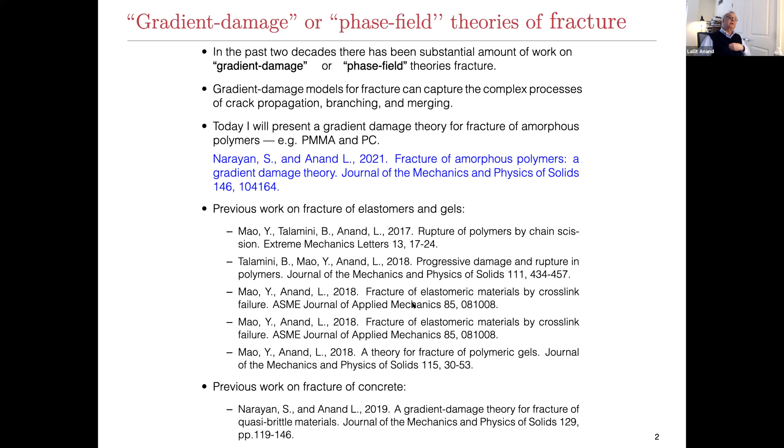I'll concentrate on fracture of polymers, the amorphous polymers, which are the simplest of the polymer types. The most common amorphous polymers are PMMA, polymethyl methacrylate, and polycarbonate. PMMA is typically thought to be brittle, polycarbonate is thought to be ductile, whatever that means, and I'll say more about that in a moment.

So PMMA, this is its chemical structure. It has a radius of gyration of the molecule of about 0.6 nanometers. The Kuhn length of the segments is about 1 nanometer. Polycarbonate is essentially the same, very similar in terms of geometric dimensions. One characteristic feature: I'm only going to talk about the response below the glass transition temperature. For reference, PMMA's glass transition temperature is about 115, and polycarbonate's is about 145 degrees centigrade.

Okay, so if you take specimens of these materials and do a compression test.

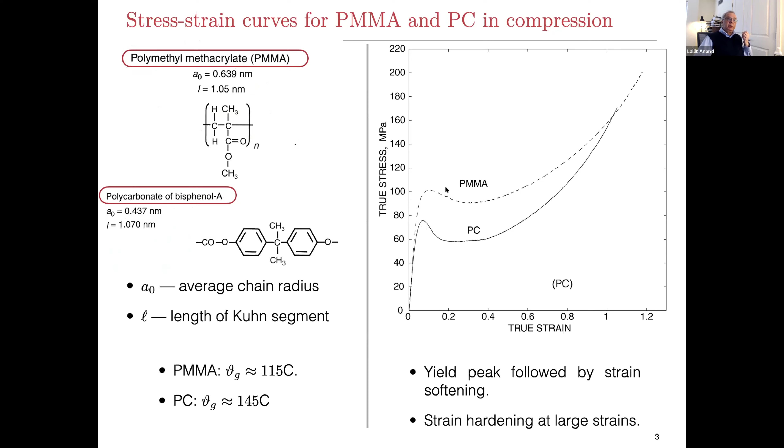So in a compression test, this is what the stress strain curve looks like. You have a yield peak, it softens, and then it hardens quite dramatically. PMMA is about 100 megapascal yield strength in compression, and polycarbonate is about 80 megapascal. So the yield peak is important in these materials.

In fact, the yield peak depends quite sensitively on the prior heat treatment of the material. If you take the material above the glass transition temperature and quench it, it has a so-called higher degree of disorder or free volume, and the yield peak is lower. If you take the same quenched material and anneal it so there are more tightly packed atoms, the yield peak is higher. This could differ by 20 or 30 megapascals just from small amounts of heat treatment.

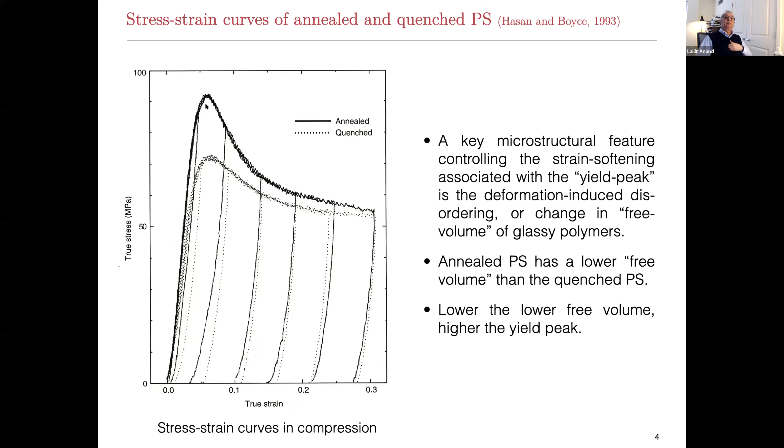The other thing to note is that this is an unloading curve. There's also plasticity prior to the peak. So people call this the yield peak, but in fact there is plasticity prior to the yield peak in the material.

Because of the softening at the yield peak, you actually get strain localization. You get shear bands. In fact, plasticity in these materials is essentially due to the formation and multiplication of the shear bands. This is in polystyrene.

Before the peak, you get some shear bands, and then near the peak you get a whole bunch of shear bands. These shear bands, since this is in compression with the vertical direction, are symmetrically disposed to the maximum principal stress direction.

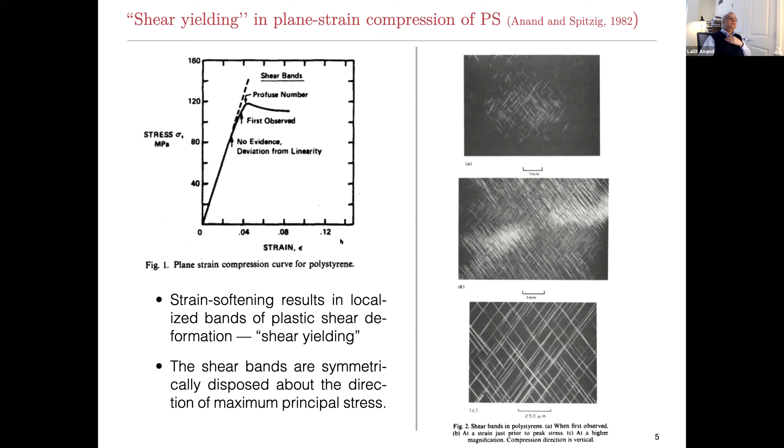Okay, so that's in compression. The response in tension is quite different. There is shear yielding prior to the peak, but PMMA will actually fail very close to the peak.

If you look at the microstructure of the material, you'll see it's filled with what look like crack-like features, but they really are crazes. Here's a higher resolution micrograph of one craze, and what you see is there are fibrils which are bridging the boundaries of the craze.

So a craze is also a band of localized deformation, but it's a dilational plastic deformation. There are these holes which are interspersed with the fibrils, which bridge the faces of the craze, and eventually those fibrils will break, and you'll form a crack.

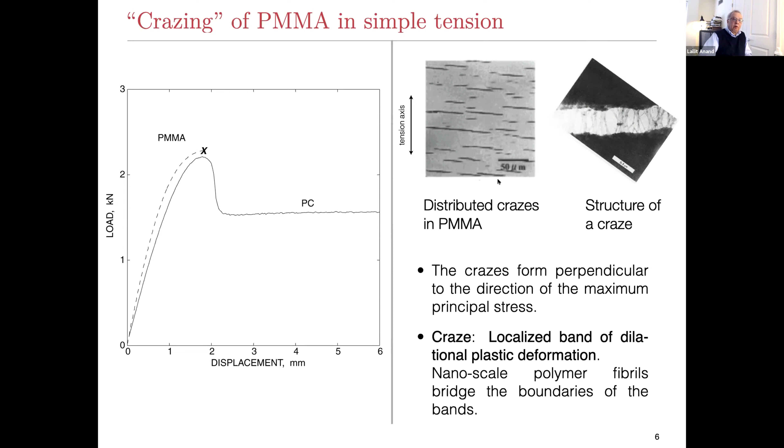Polycarbonate, on the other hand, because of that strain softening, will neck and draw out. Here's a specimen of polycarbonate—originally this was straight, but now it's necked down, and the plasticity in this is due to the shooting out of the shear bands into the undeformed region. I'll show you a movie of this drawing out process a little later.

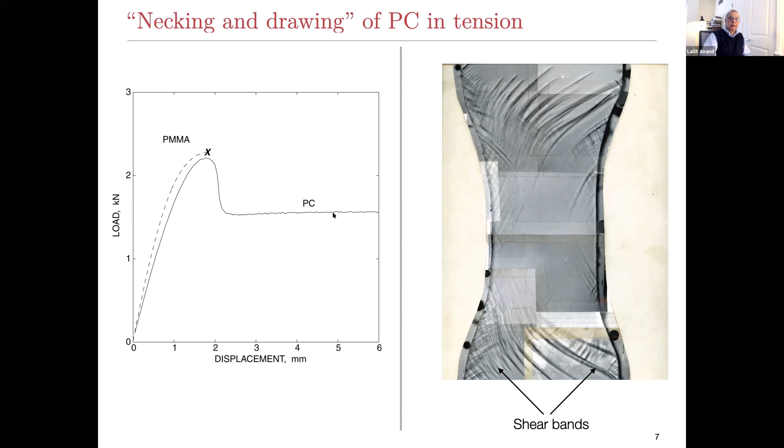So what is the major difference between PMMA and polycarbonate? In the polymer literature, there is this notion of entanglement density. Unlike elastomers, which are cross-linked, these amorphous polymers have mechanical cross-links—they're just entanglements. The number of these strands per unit volume is called the entanglement density.

The way it's measured is you measure the storage modulus, a linear viscoelastic measure, just above the glass transition temperature of the material. Based on that, using essentially a Neo-Hookean model—this will be the storage modulus, this the temperature at which you measure it—you calculate the number of entanglements per unit volume. That number is huge, on the order of 10 to the power 25 entanglements.

But there is a difference: for things like polystyrene and PMMA, that number is about 4 times 10 to the power 25, but for polycarbonate it's about 40 times 10 to the power 25. So polycarbonate is 10 times more entangled than PMMA, and that makes a big difference to the mechanical response of the material.

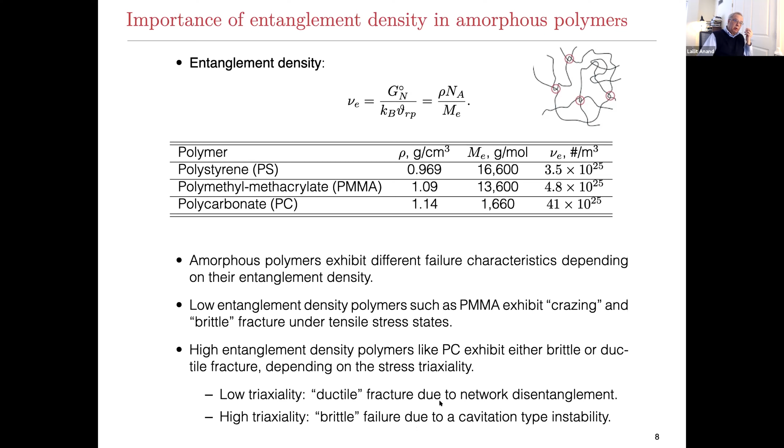So low entanglement density materials like polystyrene and PMMA will craze, and are called brittle or quasi-brittle under tensile stress states. High entanglement density material like polycarbonate will neck out and draw under low triaxial stress states, but if the triaxiality is high—at the tip of a notch, for instance—polycarbonate is also brittle. In fact, when you measure the K1C of these two materials, they're both about 1 megapascal square root meter. Okay, we'll come back to this issue.

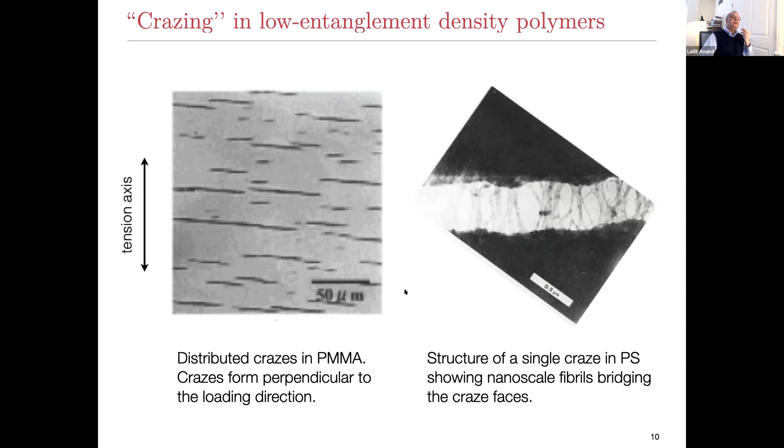So a little more—I'm going to focus first on the low entanglement density polymers and the modeling of failure due to crazing. I've shown you this picture of the fibrils bridging the boundaries of the craze. Here's a nicer looking picture of the same phenomena.

This is from the work of Desai, Kovic, Basu and co-workers in 2011. It's polystyrene, and you see these fibrils. This is the face of the craze, and the size of the fibrils is about 30 to 40 nanometers.

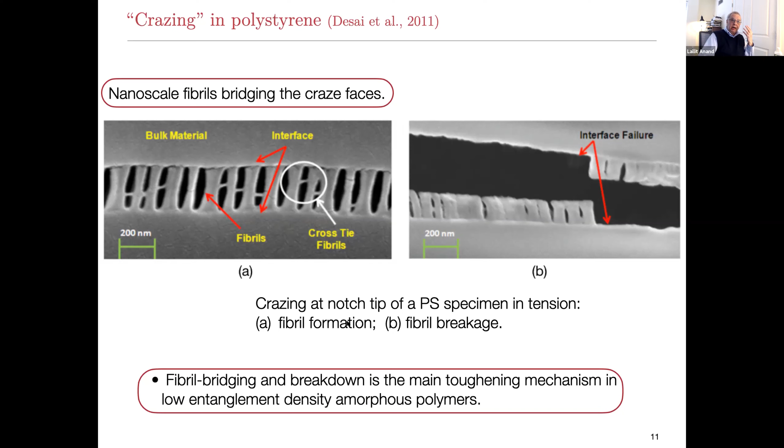Eventually the crazes' fibrils will break, and you'll get a crack. So fibril bridging and breakdown is the main toughening mechanism in materials like PMMA and polystyrene, which are low entanglement density materials. So they're not brittle, but they're quasi-brittle because there is some inelasticity and damage in these materials.

So I'm going to talk about gradient damage theory. What do I mean by damage? By damage, essentially, I mean the craze breakdown process. If the craze has broken down completely, the damage has gone to 1. If the craze hasn't really broken down yet, then the damage is equal to 0.

So there will be process zones, if you will, ahead of a crack where there's crazing, where the damage goes from 0 to 1. And in that region, there will be a gradient, mathematically. Physically, you see this stuff. So when we talk about the gradient damage theory, it's basically related to the breakdown process of crazes.

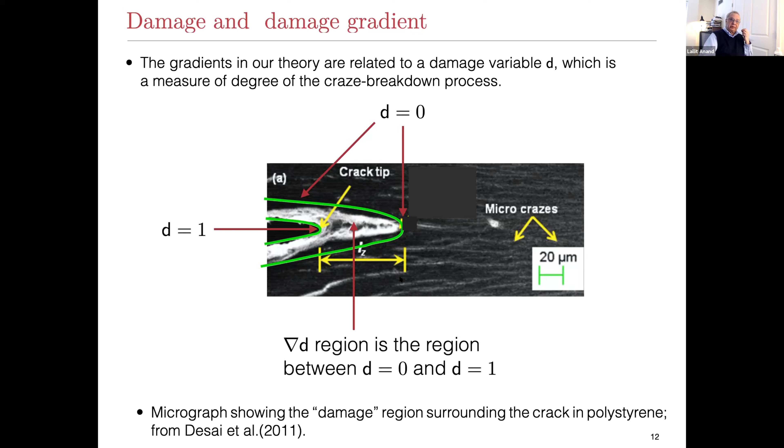So the model that I'm going to construct is conceptually very simple. In one dimension, you have some elasticity, there is some plasticity, and then at some point you'll get crazing, and then the craze will break down, and that's when you get the damage, and then you'll get failure. That constitutive model looks like a traction separation law, but it's a full 3-dimensional model.

And that will be the constitutive response at some integration point in our finite element mesh. But in addition to this damage happening, there will be a gradient in the damage. So we need to construct a theory where there's a gradient in the damage. First of all, physically, there's always a gradient, but then also mathematically, that's what helps to avoid mesh dependency related issues in finite element simulations.

And this idea, of course, goes back to Professor Bazant way back in the mid-80s and several other people in those days when people were looking at concrete and other failure of quasi-brittle materials.

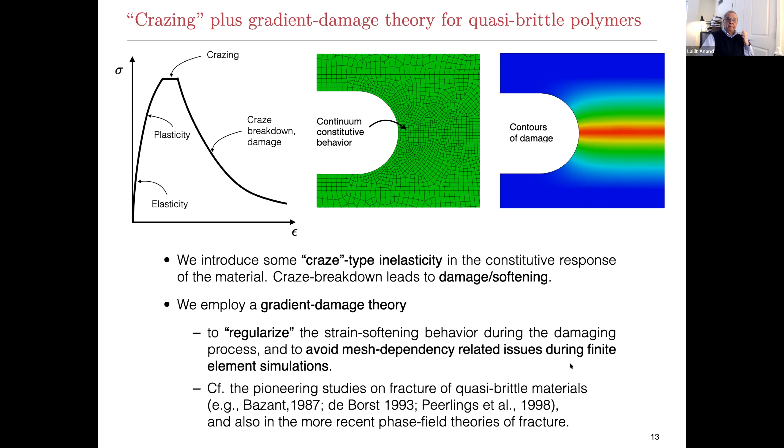So how is the theory formulated? In continuum mechanics, we'll have the motion, the deformation gradient, the velocity gradient. And I'll take the deformation gradient to be decomposed into an elastic part and an inelastic part. I use the word inelastic because I want to differentiate between plasticity and crazing.

So the evolution equation for Fi, the inelastic distortion, will be di Fi. I'll ignore the inelastic spin. And di is either a dp or a dc — P for plasticity or C for crazing. So there's going to be a switch in the mechanism at a certain point in the deformation history that we have to define, where di can be either dp or dc.

So dp is given by a deviatoric plastic stretching, a shear rate, and a direction. And dc is a dilatant inelastic crazing. The trace of dc is not equal to 0, whereas the trace of dp is equal to 0. So there will be a magnitude for crazing, and the direction will be related to the maximum principal stress.

All right, so there will be a switch in the flow rule. If I look at the velocity gradient, I can write it in terms of an elastic velocity gradient in Fe, and this di Fe inverse. And I can rewrite it in terms of gradient of chi dot — chi being the motion, so this is the velocity — F dot E Fe inverse, and then these two additional terms for gamma dot P and craze rate.

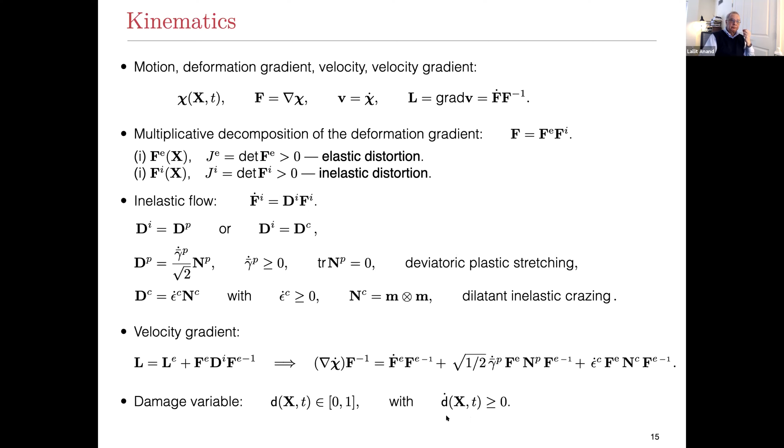So the theory that I will discuss is based on this virtual power formulation of the basic balance laws. What are my kinematical variables? My kinematical variables are chi dot, which is the velocity, Fe dot, gamma bar dot P, which is the equivalent plastic shear strain rate, the craze strain rate, and the damage rate. These are not independent because they're constrained by this kinematical relation that I just discussed. In addition, we have the kinematical constraint that D dot is positive. So these are my kinematical variables, which have to obey these constraints.

Corresponding to chi dot, if I look at any part of the body, we can think of an external work, which is rate of work done on that part, and an internal rate of work. The external power is chi dot times the traction acting on the boundary of the part, plus chi dot times the body force, which can include inertia. Because of this gradient damage term, there's also a boundary micro traction term that comes into play.

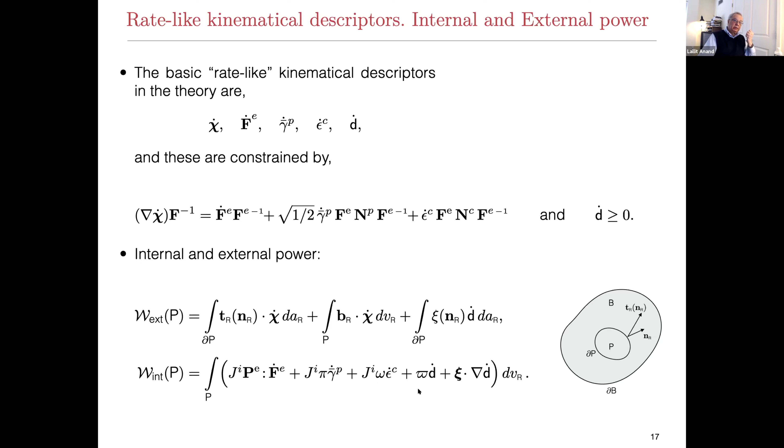So these were my kinematical fields, and I'm going to treat them as virtual velocities to figure out what the basic balance laws are. So instead of chi dot, I'll write chi tilde for a virtual velocity, f tilde e for a virtual f dot e, and so forth. Those virtual quantities have to satisfy the same kinematical constraints that we had previously.

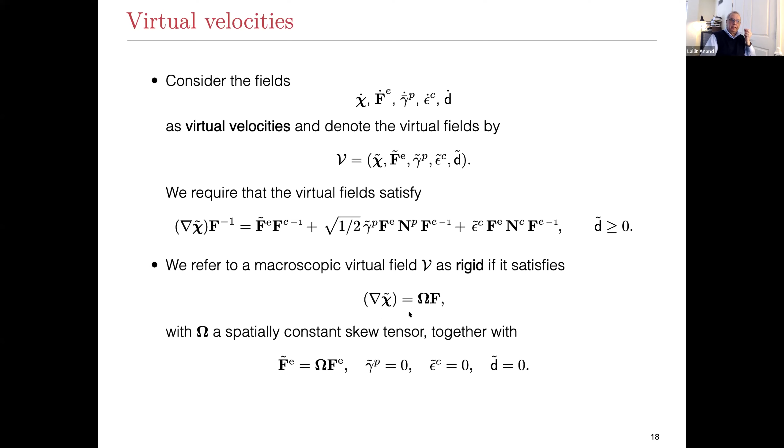I'll need one other notion, and that is the notion of a rigid virtual velocity field. A rigid virtual velocity field is essentially one for which there's no plasticity, no crazing, no damage. Basically the velocity gradient is omega, which is a skew tensor times f, and that omega is spatially constant. So it looks like a rigid rotation, or a rigid spin.

So here's my external virtual power, and this is my internal virtual power. The principle of virtual power says that given any part P of the body, the external power has to equal the internal power for all virtual velocities. That's the first part. The second one is, if the virtual velocity is rigid, then the internal virtual power is 0.

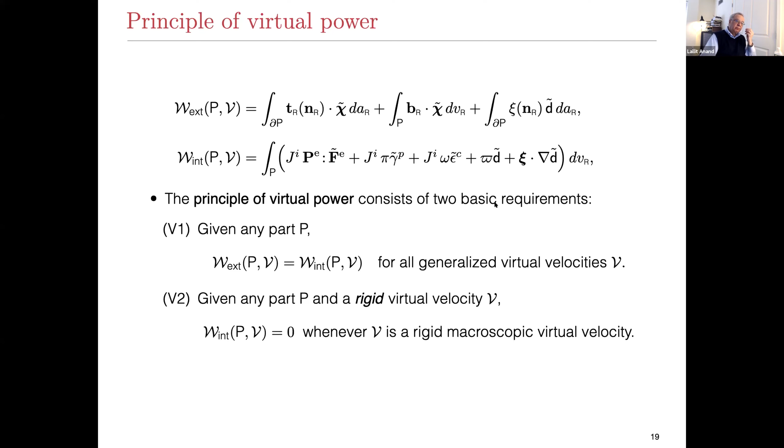And that is the principle. If you apply this principle, you will get the basic mechanical balance laws for the theory. The first one is you get the macroscopic force and moment balances. If we remember PE is conjugate to FE dot, but we have these other terms, so I can define a stress T sub R based on the conjugate PE and FI inverse. That stress satisfies a force balance and a traction condition, as well as a symmetry condition. And that, of course, is the classical first Piola Kirchhoff stress.

The Piola stress is related to the Cauchy stress by the standard relation, J inverse TR F transpose. We can define two other stresses: the elastic second Piola stress and the Mandel stress. The elastic second Piola stress is essentially like the total second Piola stress, but now with respect to FE inverse. And the Mandel stress is CET.

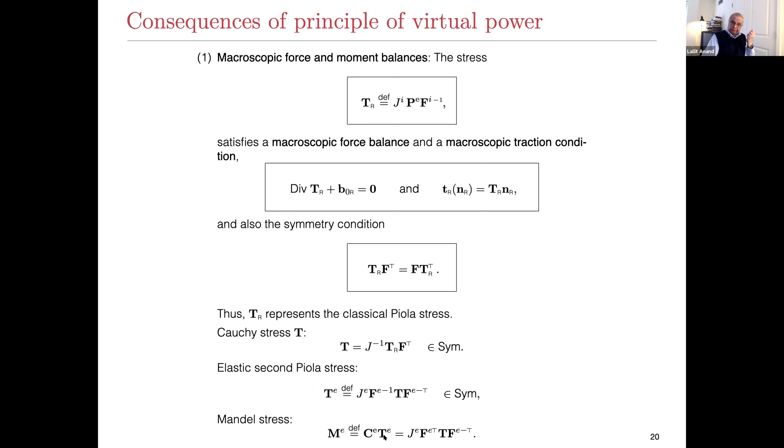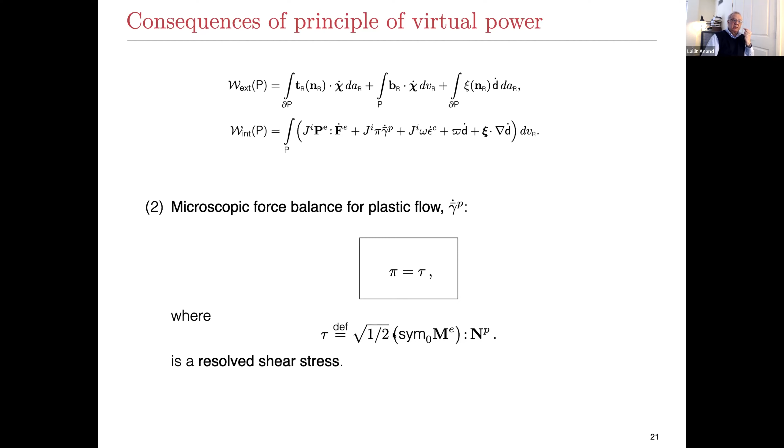So that was the first balance. Then we have this force pi, which is conjugate to gamma bar dot P. That scalar microforce is balanced by a stress tau, which is the symmetric deviatoric part of the Mandel stress dotted with the direction of plastic flow. So that's the resolved shear stress. Pi is balanced by a resolved shear stress.

Similarly, this omega, which is conjugate to epsilon dot C, the craze strain rate, is balanced by a resolved tensile stress, which is the Mandel stress dotted with the direction of crazing. The last ingredient, which is important, is that this vector microstress and that scalar stress satisfy its own balance equation: the divergence of that vector microstress minus the stress var pi, which is conjugate to d dot, has to be equal to 0. Also, this microtraction is equal to xi dotted with n sub r.

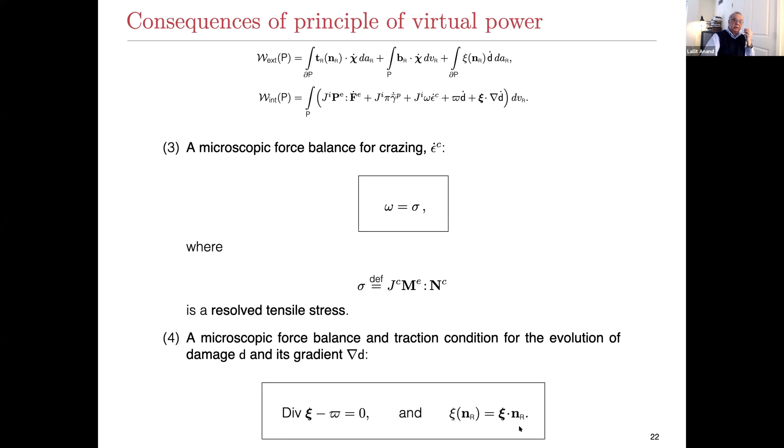Okay, this is what's going to give us the second partial differential equation for the damage in the gradient damage theory. Once you have the traction condition, you can put that in here, that little t of n sub r is capital T sub r n sub r. And similarly for this term, so that's the external power.

The internal power, we had PE dot of the FE dot. I'm going to rewrite it in terms of the elastic second Piola stress and the rate of change of CE dot, CE. And that can be substituted in here. Of course, there's a power balance that the external power and the internal power have to be equal to each other for all parts P in the body.

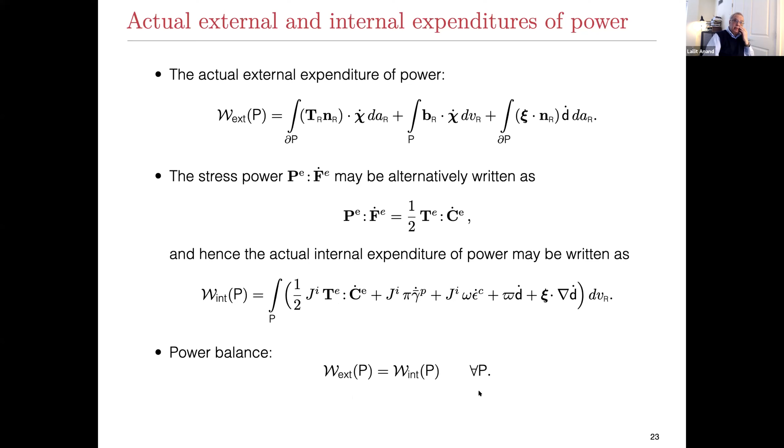So the next item that I need is the thermodynamics. Under isothermal conditions, the rate of change of free energy of any part has to be less than or equal to the external power of the part. But we just showed that the external power has to be equal to the internal power.

You stick everything in and you get the local form of the free energy imbalance, if you like. So this is the rate of change of free energy. This is the elastic power. This is the plastic power. This is the power due to crazing. This is the power due to damage. This is the power due to the gradient of the damage.

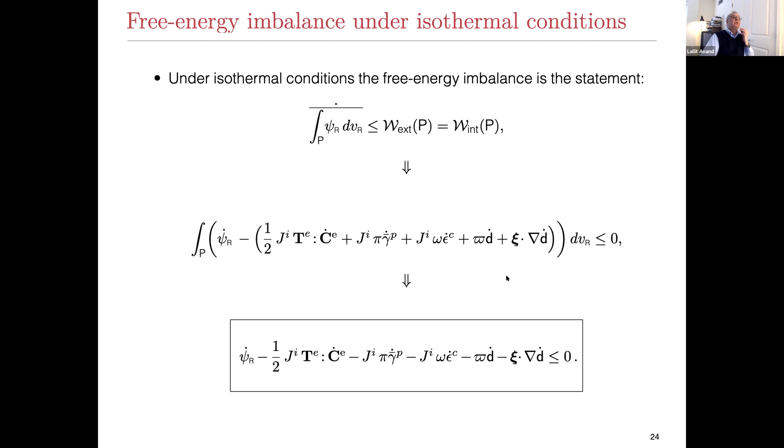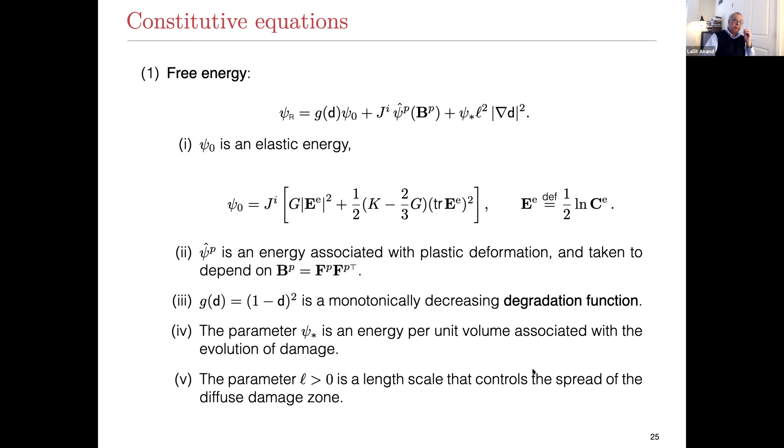Once you have the elastic energy, you can take the derivative and calculate the Mandel stress. Remember, this G of D is the degradation, so as the damage progresses, the stresses will decrease. The Cauchy stress is related to this Mandel stress through this relation.

And in terms of the Mandel stress, we can define a mean normal stress, an equivalent shear stress, and a stress triaxiality, which is the mean stress over tau bar. When I write ME0, the 0 basically means the deviatoric part of a tensor.

This tensor is symmetric, so it has a spectral decomposition. So you have the principal stresses and the principal stress directions of the Mandel stress.

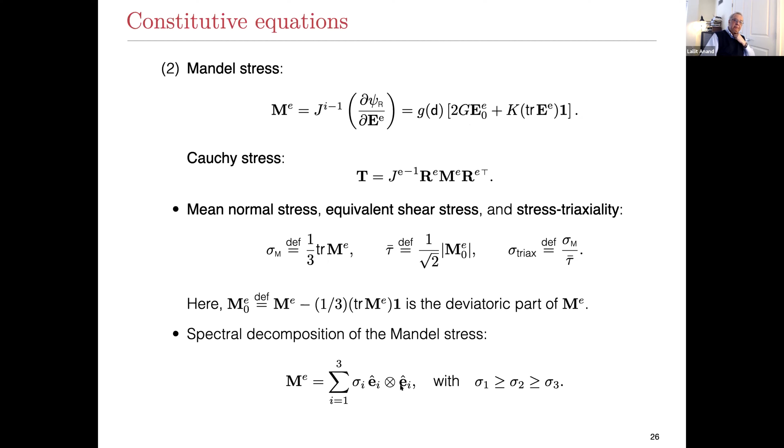So to account for the strain hardening in these polymers, especially in compression and for large strains, we introduce this plastic free energy, if you will, which depends on BP. I'm going to use a Gent form in terms of two material parameters, mu sub r and I sub m. Mu sub r is a ground state shear modulus, and I sub m is what controls the locking behavior of this material.

If I take the derivative of this, I can define a back stress. This is much like kinematic hardening in regular plasticity. There's a back stress which is energetic, and that back stress is the shear modulus, this generalized shear modulus, times the deviatoric part of the BP.

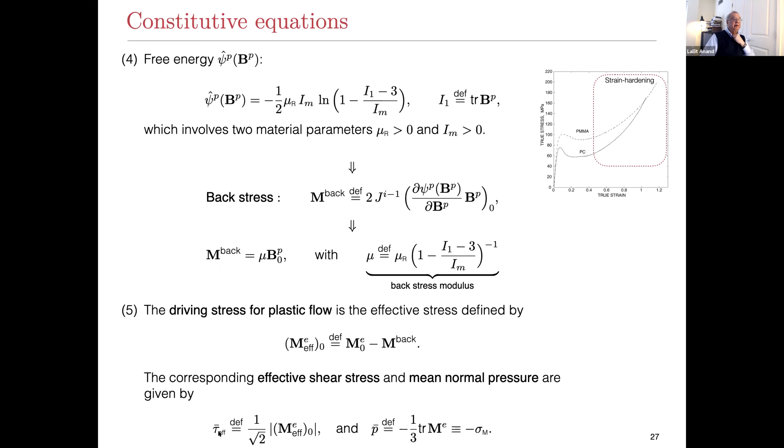The way it appears in the plasticity is the regular deviatoric Mandel stress minus the back stress. I'll call that the effective deviatoric stress. And based on that effective deviatoric stress, you have effective shear stress and a mean normal pressure.

All right, so now I need to give an evolution equation for F sub I. As I said earlier, I'm going to use a switching rule between plasticity and crazing. So let's just concentrate on the plasticity.

On the plasticity, DI will now be DP, which is a shearing rate, times the deviatoric part of the effective Mandel stress divided by 2 tau bar effective. And the direction we know now, based on the Mandel stress and the back stress.

Don't worry too much about the details of this. My focus here is more on the damage and fracture. This other plasticity part is pretty well known and has been used quite widely in the literature before.

So remember I told you about the yield peak. For the yield peak, I need to introduce an internal variable which I'll call S, and another internal variable which represents the free volume of the material, phi. These two together will help model the yield peak of the material.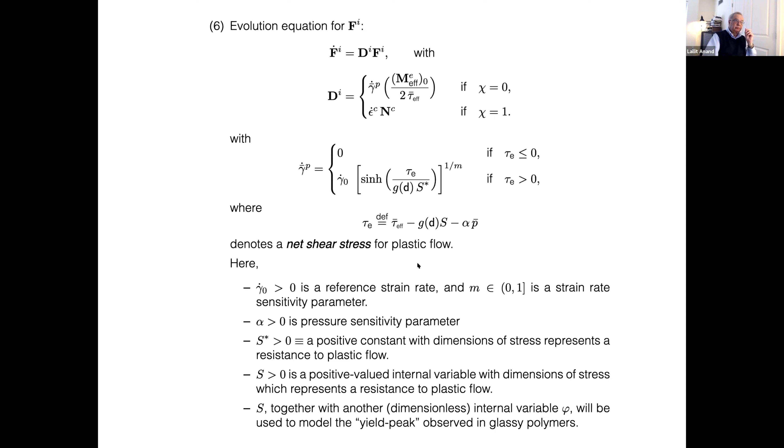Look at the yield peak over here. To model that, I'm basically going to have a couple sets of evolution equations, one for S and one for phi. Again, don't worry too much about it. We can discuss the details, the form of this later. There's nothing fundamental—it's cooked up to be able to reproduce this kind of response.

The essential idea is there is this free volume in the material which will increase as deformation progresses, and that free volume will change the resistance to the sliding of the polymer segments. Those two changes in the end result in the overall yield peak response.

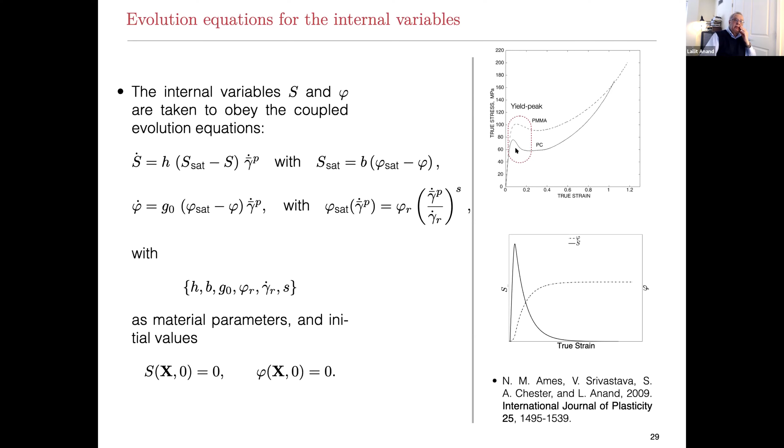So now to this part about the crazing part of the flow rule. We want to switch from plasticity to crazing—so plasticity is happening, and I want to switch.

That switch I will introduce if two conditions are satisfied. First, the maximum principal stress should be positive—that's when crazing happens under tensile stress states. Second, there is this craze initiation criteria that people have studied for quite a while now, almost 40 some years. The work goes back to Sternstein and co-workers, and Andrews and several others.

The idea is that when the mean normal stress reaches a critical value, crazing can occur. But the mean normal stress is conditioned by the deviatoric shear stress. So physically, what is envisioned is that the shear stress somehow loosens up the tight molecular structure in the polymer, thereby eventually permitting crazing to happen at a certain critical value of the mean normal stress.

There have been several molecular dynamic studies over the years. The ones I'm familiar with are by Estevez, and Long and Mahajan and Hartmaier, from about 10 years ago. So this criteria has been sort of agreed on based on a number of experimental studies as well as molecular dynamic studies.

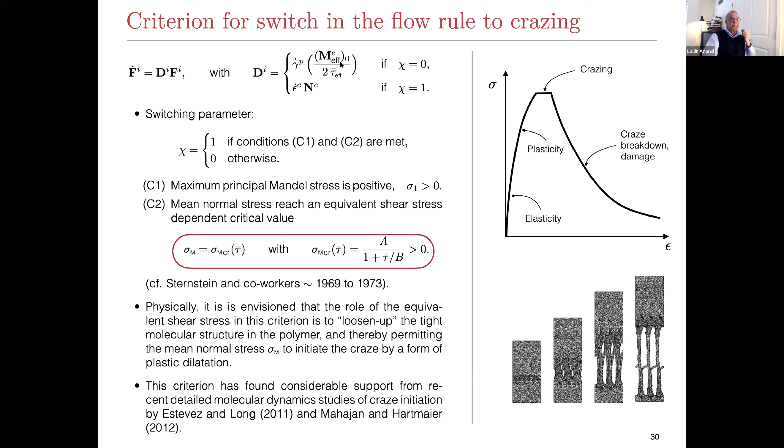So DC is epsilon dot C NC, and the direction is in the direction of the maximum principal stress for the Mandel stress. The craze strain rate depends upon this resolved normal stress and a craze resistance. And the craze resistance can damage, because that will give you the breakdown.

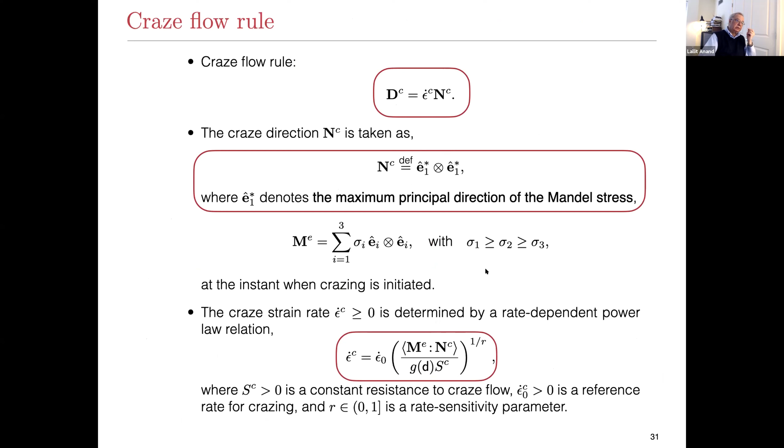It's a simple power law relation, which not much is known about. So we have to cook up something.

Now the important part—remember this microforce balance. This is the stress vector xi, which is conjugate to the gradient of the damage. This is conjugate to the rate of change of damage itself. So that has to be satisfied whenever the damage is growing.

So now we need constitutive equations for this vector microstress and the scalar microstress. The vector microstress I've already given is the derivative of the term I had in the free energy in terms of the length scale and psi star and the gradient of the damage. And this comes in from the elastic damage term.

And then there's a dissipative term that you have to add. This last term is a numerical viscous regularization parameter—once you're softening and failing numerically, it helps to have this viscous regularization parameter. Once you accept these thermodynamically consistent constitutive equations and put them in the microforce balance, out comes this partial differential equation for the evolution of the damage.

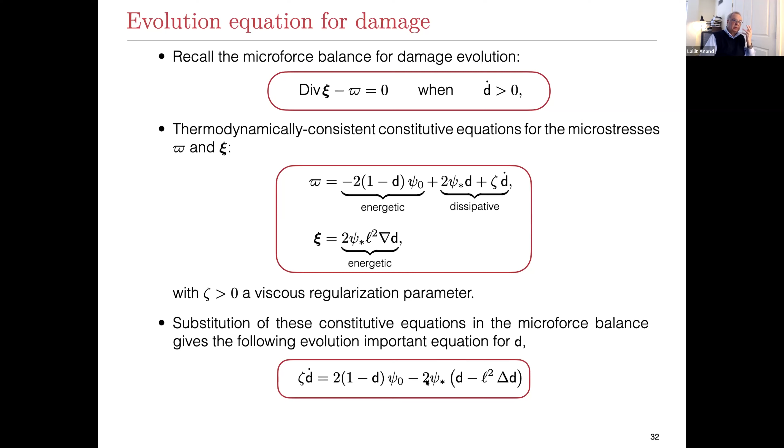Okay, but we need one other ingredient. So this was true when damage is happening, that microforce balance, but when does damage actually start? The theory doesn't tell you that. You have to introduce it as an additional ingredient.

And the simplest thing you can think of is when the craze strain reaches a critical value, then damage starts. Then the fibrils sort of say, ouch, I'm done, I'm going to break, and then damage starts. So you introduce a craze strain criteria, a critical craze strain criteria. That means as long as the craze strain is less than some small number, there's no damage, no craze breakdown, but after that, it satisfies that partial differential equation.

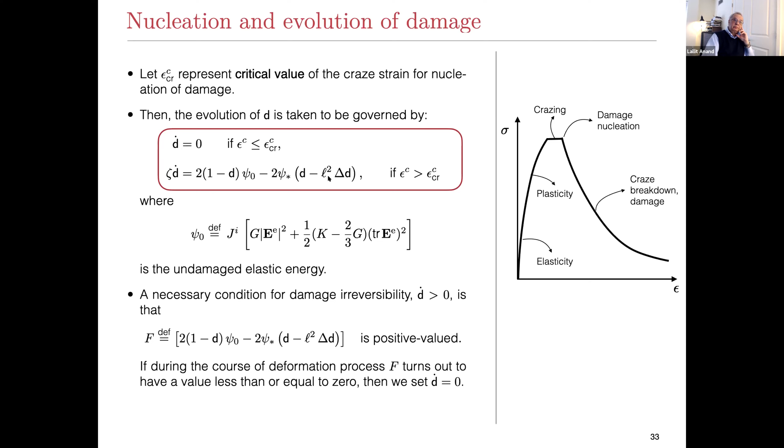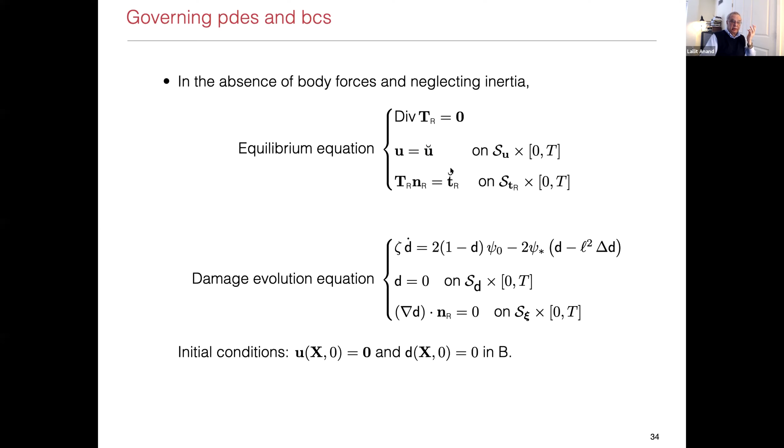So now we have two PDEs. We have the standard equation of motion—as I said, I was going to neglect inertia and body forces. And then I have this other PDE for the evolution of damage. They need boundary conditions, and these are standard boundary conditions.

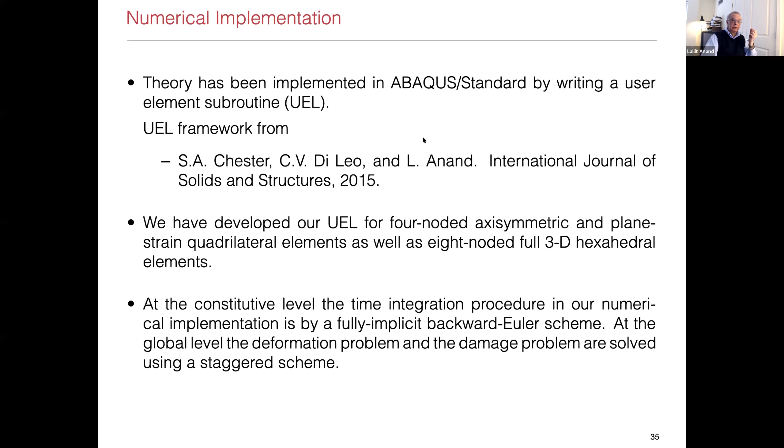So you have to implement these PDEs numerically. My student Suraj implemented them as a UEL in Abaqus. We'll skip the details for now. There are some material parameters that are needed in the theory. Let me just show you what the parameters for the plasticity are.

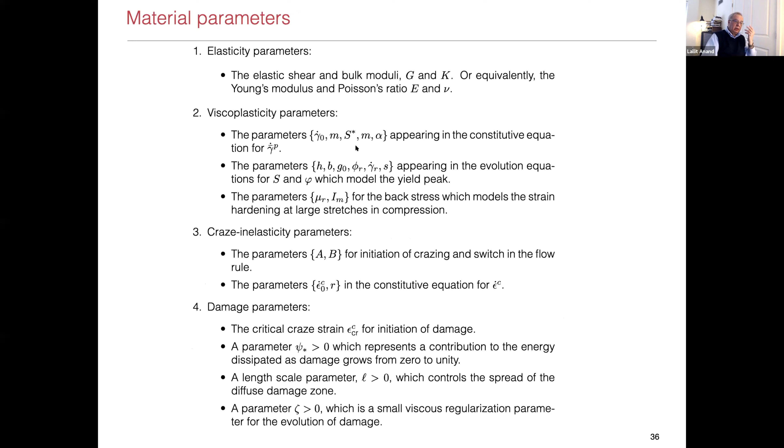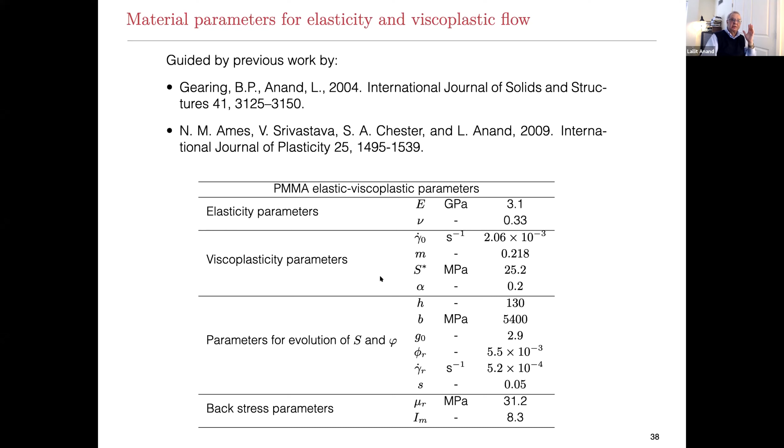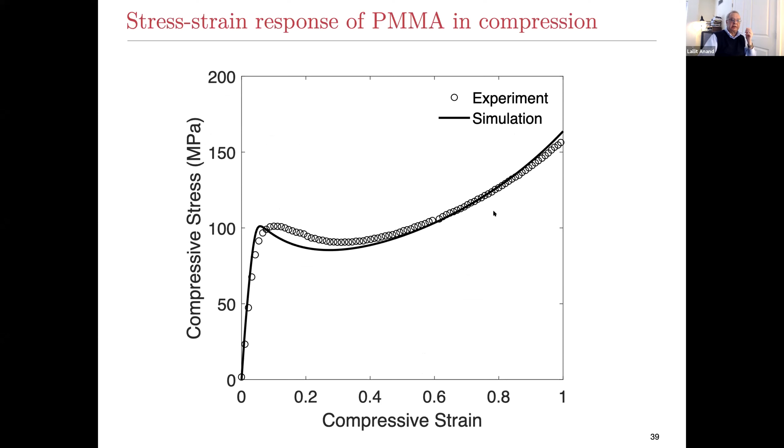So there's experimental data, some work that I had done going back to 2004 on PMMA and polycarbonate. Based on that, we can determine the parameters for the plasticity part. Again, please don't waste too much time trying to understand the numbers, but in the end, what you get is you can, for the compression test, approximate the elasticity, the plasticity, the yield peak, and the strain hardening. That's PMMA in compression.

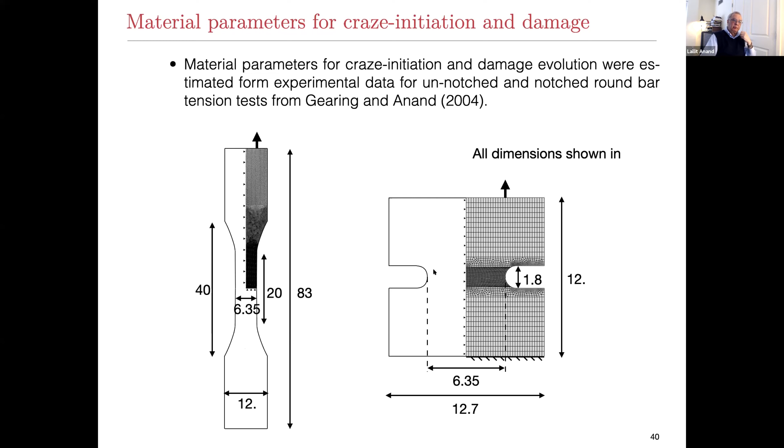But now we want to calibrate the material parameters for the crazing and the craze breakdown and the like. So here, this is a smooth bar tension test in PMMA. This is a notched bar tension test. From here, you can try to estimate, as I'll show you from these experimental data, what the craze initiation condition is.

So if you do a round bar tension test on PMMA, you see this load displacement curve. It's not linear—people treat PMMA as a brittle material with linear elastic response. It is not. So you get this nonlinearity, and this is the linear response. These are the material parameters that I showed you before, from the plasticity part, the elastic plastic response. And then from this point, you can estimate by doing the numerical simulation what the mean normal stress is and what the equivalent shear stress is at which craze starts.

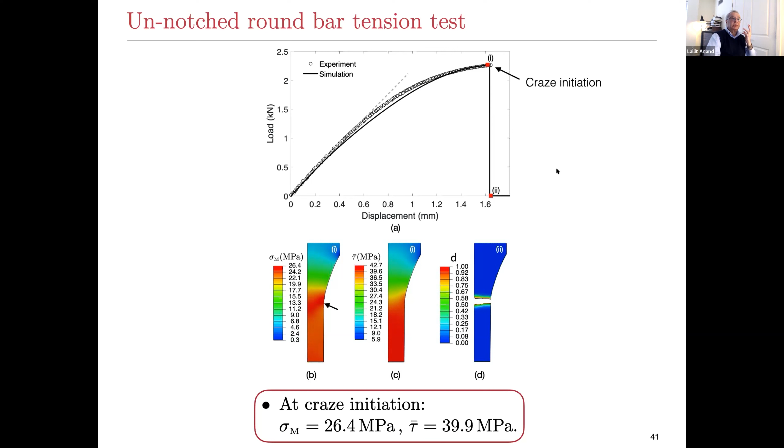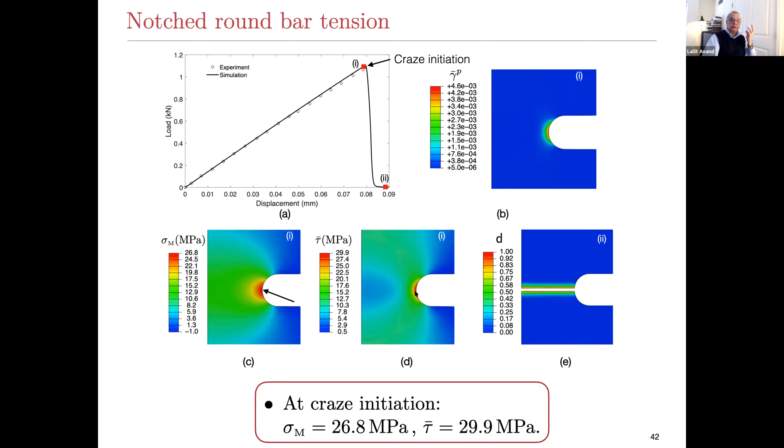You can do a similar thing in a notched round bar specimen. Again, there is plasticity at the notch root, but there you can also figure out what the mean normal stress is and what the shear stress is at craze initiation. And once you have this two sets of data, you go back to your craze initiation condition, and you can estimate what that parameter A is and what that parameter B is.

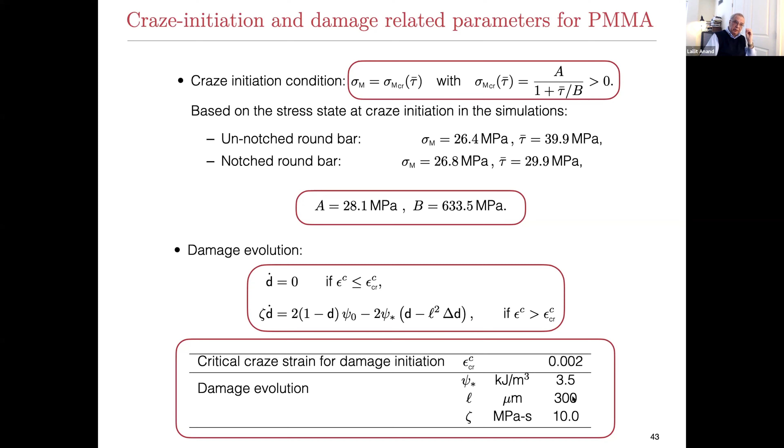And then what you need are the damage evolution conditions. You need a critical value for the craze strain. Not much is known—we choose it to be a small number, 0.2%. Maybe it's too large, I don't know, but it's fine. And then for psi star, the length scale, and the viscous regularization parameter, you need some other numbers. This length scale, 300 microns, is perhaps not physically realistic, but if you go much smaller than that, numerically it's very hard to do calculations. So there's some balance of psi star and L needed to figure out how the damage is actually happening, to do it in a computationally tractable manner.

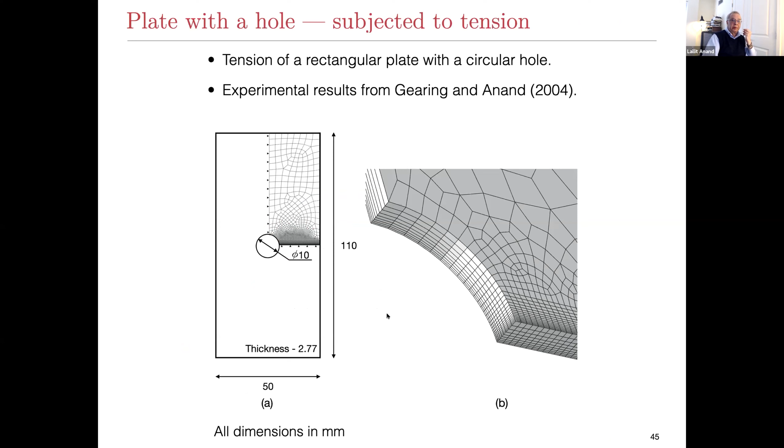So let me just show you some simulations. The first one is a simple one, a plate with a hole in it. It's a 3D calculation, and there's some data on PMMA. As you'd expect, crazing is going to happen and propagate across. But we should also be able to predict the load displacement curve in this.

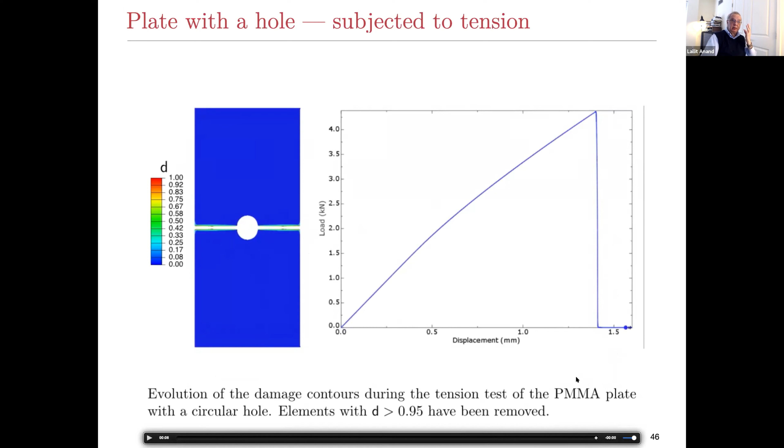When crazes initiate, the mean normal stress is about 26, the tau bar is about 42, and so forth.

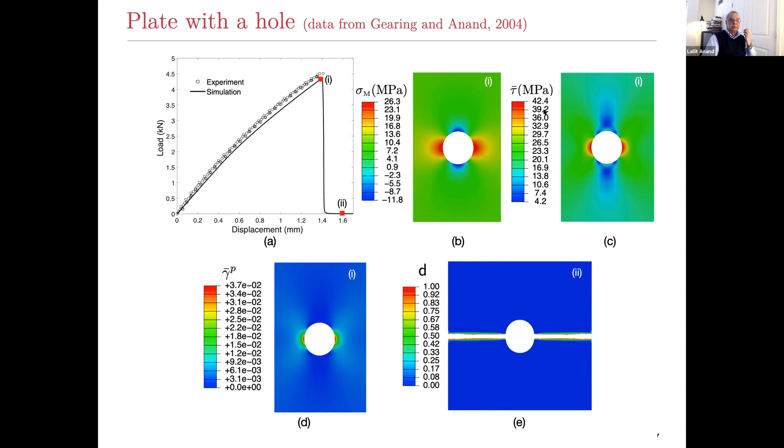So here's some additional tests, experiments done by a group in Tehran, an Iranian group, in 2015. People are very familiar with the Brazilian disc compression test, but instead they did something different. Their discs had fixed dimensions: 80 millimeters, 40 millimeters, thickness 10 millimeters. But they changed the notch - they had this funky V-O notch.

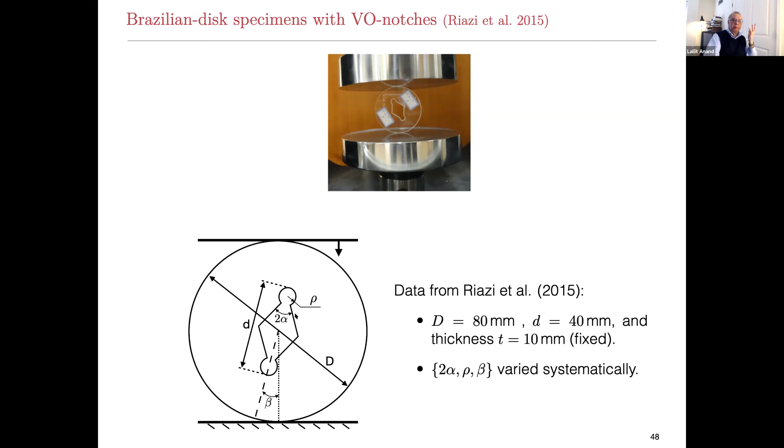It's this kind of V shape with a hole at the end. The V has a certain angle, and the hole has a certain radius at the end. This whole thing can be changed - that beta can be varied with respect to the compression direction. So there's no sharp cracks, just this geometry with a blunt notch end.

With the parameters calibrated, you can do the simulation, and what you find is that crazing happens again when the mean normal stress and tau bar reach a critical value, and then the craze will propagate. For beta equal to 0, that means it's vertical - it'll propagate in that direction, as expected, because the maximum principal stress direction is horizontal. When it hits the boundary, you get this little upturn numerically, but physically, once it hits the platen, it's going to fly off, so don't worry about this upturn.

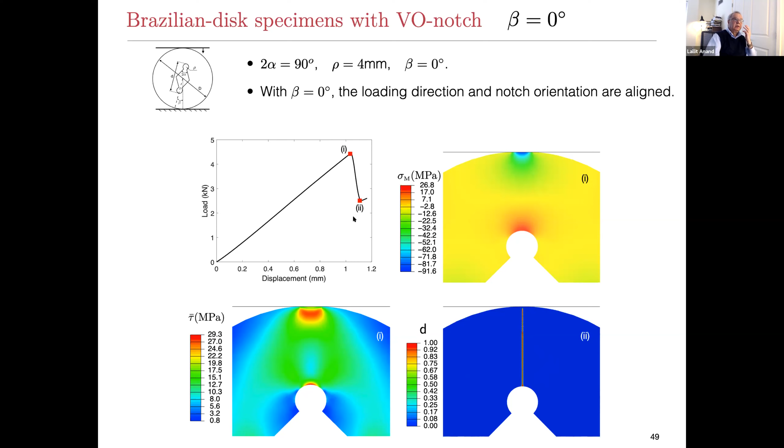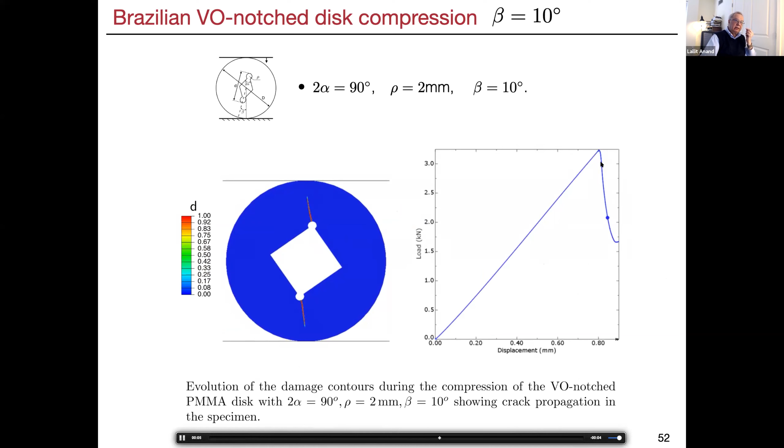Remember, we didn't try to fit their PMMA material property data - the material properties were from some other experiments I had before. So these things can be quite sensitive to the thermal history of the material.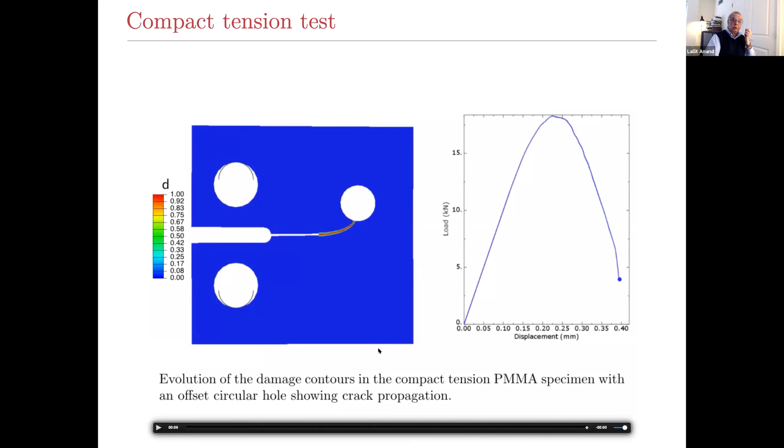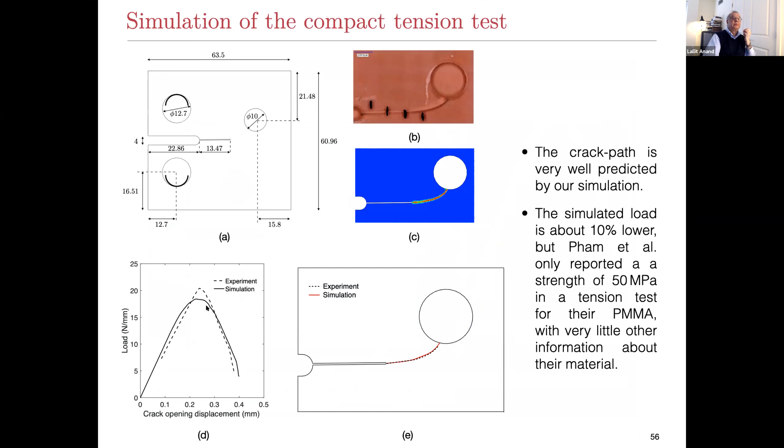So here's their actual experiment, this is the simulation, this is the overlay, and this is the load displacement curve. All looks good. Okay.

Actually, looking at the time, I was way too ambitious that I will also do polycarbonate. So I will stop here and discuss polycarbonate a little later if people are interested. I'll take questions and stop here. Thank you.